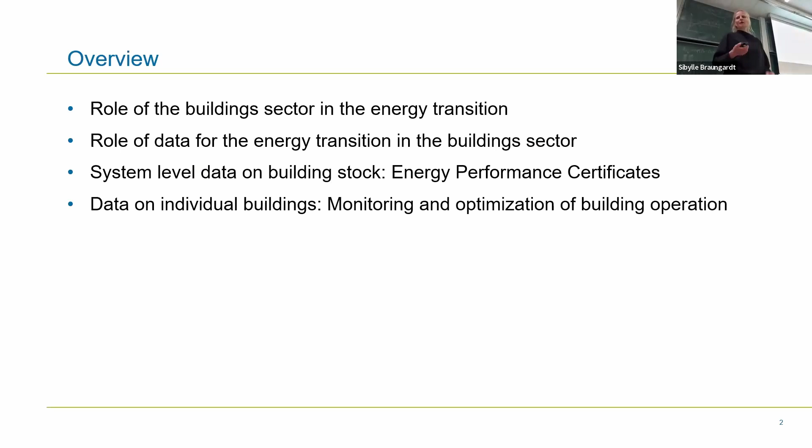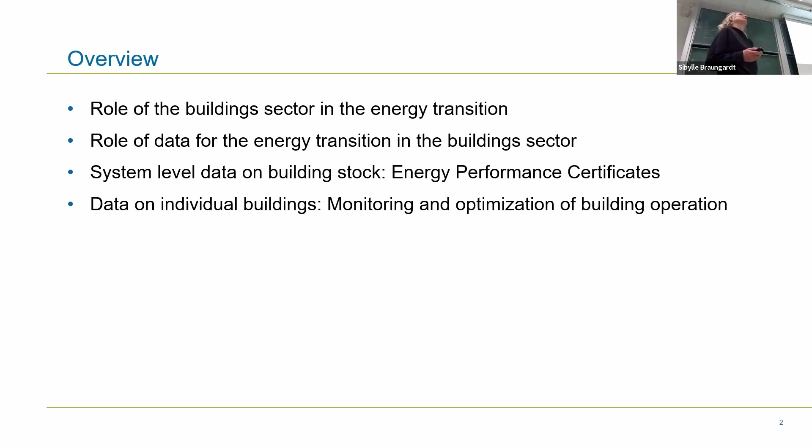Okay, so I start by trying to convince you that buildings and heating sectors are really important for the energy transition. Then I speak a bit about the role of data for the energy transition, giving one example on the system level, looking at information on the whole building stock, which is important for the planning of policies or measures in the context of the transformation, and then on data on the individual building level, rather on monitoring and optimization of building operation.

So why is heating and cooling important? One reason is that heating and cooling accounts for about half of EU energy consumption. A similar value holds in Germany, so it's really a very important share of energy consumption in that sector, and it's really important to look into that.

Another reason is that about two-thirds of total EU gas imports go into the heating and cooling sector, so it's also very important in terms of energy security. It's a sector where the share of fossil fuels is very high - only about a quarter of energy consumption comes from renewable energies in the heating sector. So it's one of the sectors with a very high share of fossil fuels, where there's a lot to do for moving towards climate neutrality.

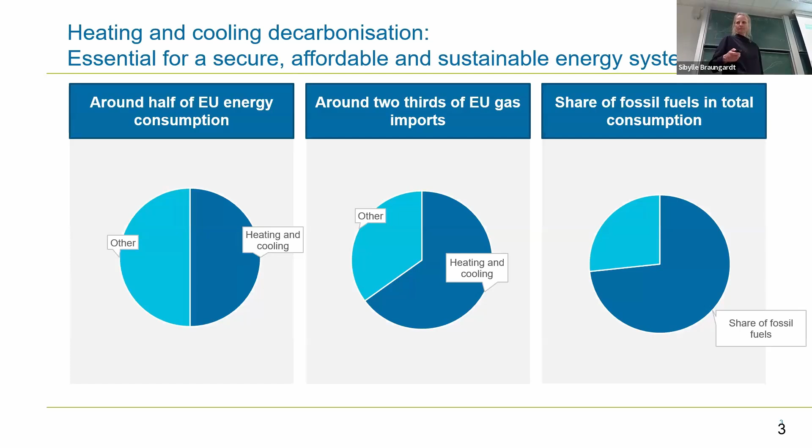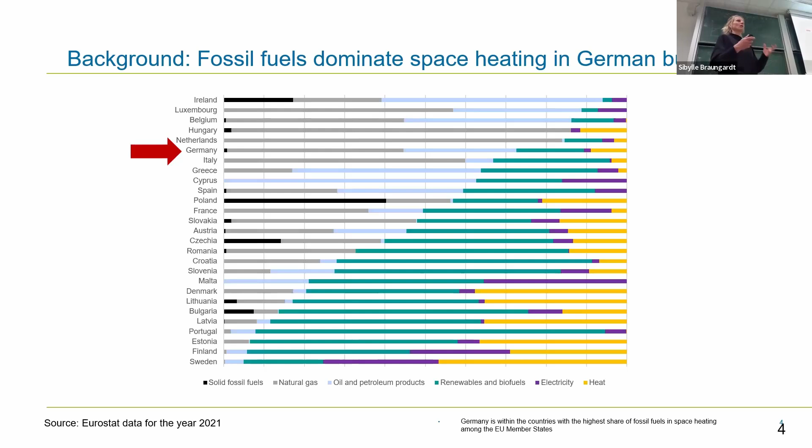This is particularly the case in Germany. Here we can see the distribution of energy carriers in the space heating sector in different EU member states. Everything that is gray or blue is fossil fuels, and we can see that Germany is in the upper level with a very high share of fossil fuels. So it's a sector where there is really a lot to do. Also, it's a sector with very long lifetimes, so it's difficult to move ahead, and this puts even more pressure on the sector. This is also why it is right now in the focus in terms of policy making, so quite a lot of effort goes into the building sector.

Another reason is in terms of greenhouse gas emissions. In Germany, we have the Climate Change Act that sets legally binding targets for reducing greenhouse gas emissions for each individual sector. The building sector is the only sector of all in Germany that has always failed to meet the targets. There were opportunities from the year 2020 until 2025, and the building sector is the only one that never has met its target. So again, this adds to the list of reasons why the building sector is very important to deal with.

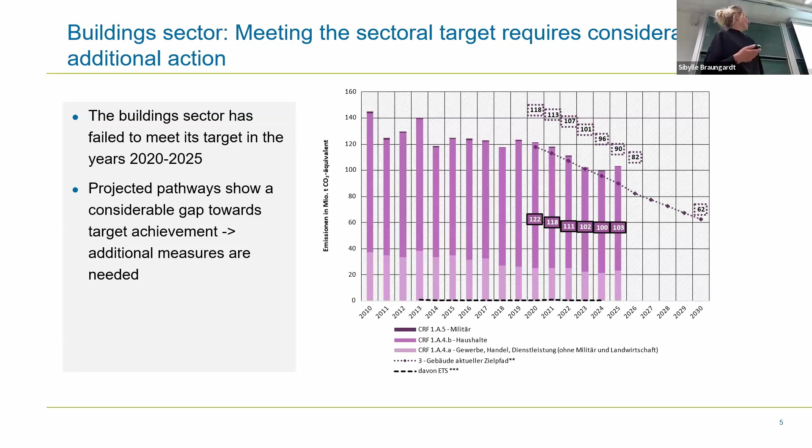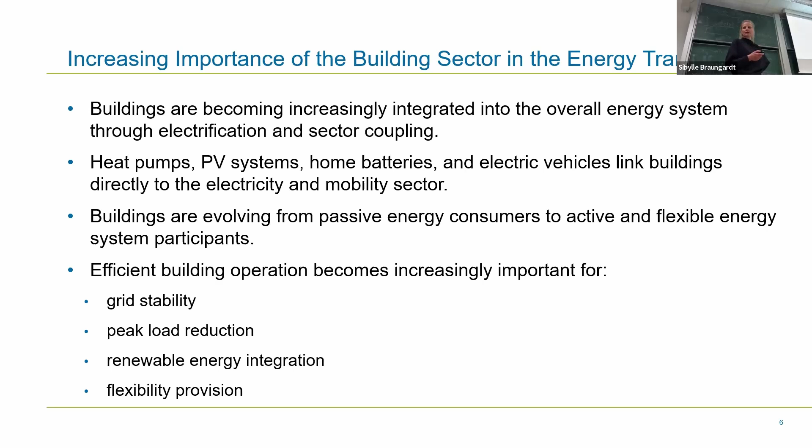When looking at the building sector in the context of the energy system, buildings are also increasingly becoming important in the context of the electricity sector through sector coupling. Using heat pumps, PV systems, batteries, and so on has a direct connection to the electricity sector. Being able to automate processes in the building sector is also very important in terms of grid stability and keeping peak loads at a level that is reasonable for the grid, for renewable energy integration, and also for flexibility. In principle, the building sector has large potential to provide flexibility, but this depends on the way in which it is operated.

So there are some challenges with this, and one big challenge is the data on buildings at a system level. In order to make plans on how to move forward in the building sector, it is important to have data to know about the energy consumption of these buildings.

We do have good data on some structural facts of the building sector - we know the number and type of buildings, whether they are single-family homes or multi-family homes, we have information on construction years, and on the main energy carriers used. This information comes from the census, so for a residential building there is quite a lot of information. But what we don't have is good data on energy efficiency levels and on energy consumption in the building sector. So there is really a big gap of data in these two areas.

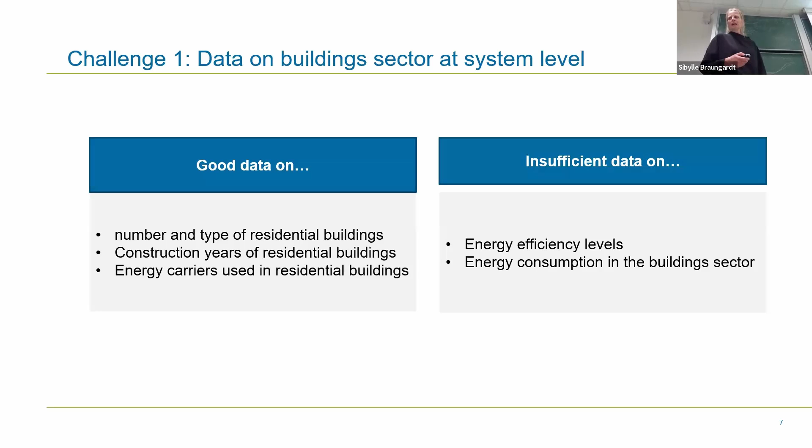The main tool to get information on this, implemented at the EU level, is that all EU member states have energy performance certificates. This is the key tool to provide information on the energy performance of buildings. Probably most of you know the EPCs - in case you have ever rented or owned a building, you should probably know them. These are developed or issued by qualified auditors and are supposed to provide information about the buildings. Basically, this is a tool for the individual level, so that one knows about the energy performance of an individual building.

This is also the only official source of information that gives an overall picture of the energy consumption of all buildings. There is a database which includes not all, but a large selection of these energy performance certificates.

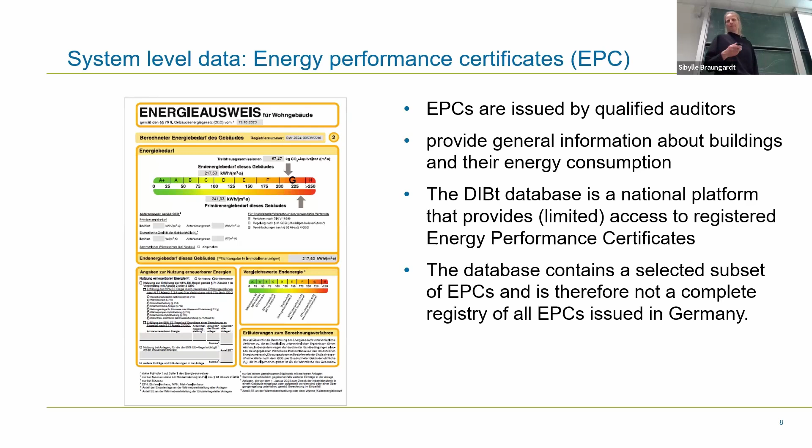That is sort of the only official source of information on how the building stock in Germany is distributed over energy efficiency levels. There are two types of these building certificates. One is demand-based, based on calculations. A person goes into the building, checks the insulation, the windows, and so on, then does a calculation following a certain procedure to calculate the theoretical energy consumption of that building. The other way is a consumption-based certificate, based on the real measured energy consumption of the past 3 years before issuing the certificate. So it reflects real user behavior and is much easier because you basically just need the consumption data.

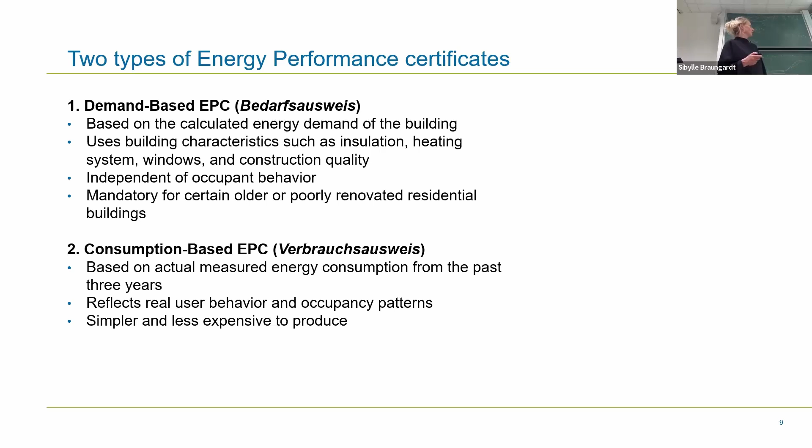This is both legally permitted to have these two types, and the demand-based certificates are mandatory for some older buildings.

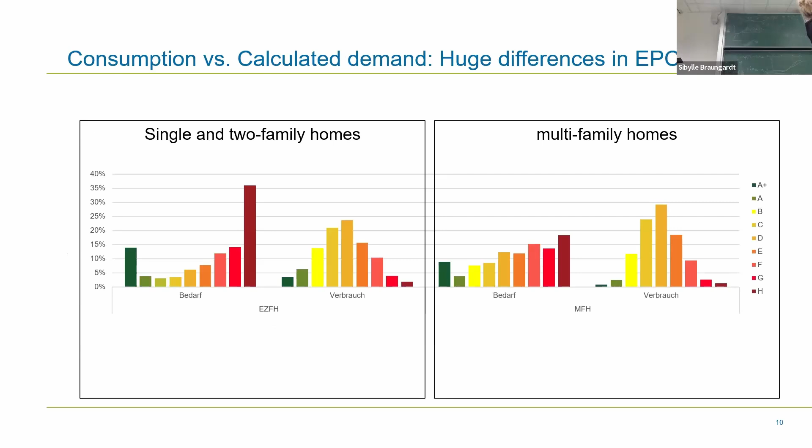Now we come to the problem with this. Here we can see the distribution of energy efficiency classes in Germany based on the database of these energy performance certificates. On the left-hand side are single and two-family homes, on the right-hand side multi-family homes. On each graph, the left side shows demand-based certificates, the right side shows consumption-based certificates. One can see they look very different.

They look completely different. One can see immediately that the calculations don't have anything to do with the consumption-based approach. As I said, it's the only official source of information we have on the energy performance of our building stock, and we have the situation where these two certificates differ very considerably.

Can you give intuition why this is the case? Why is it so dramatically different? Yes, we come to that. It's important to understand what the issues are. I will come to some issues with the consumption-based approach, and some issues with the calculation-based one.

There are some proposed solutions on how to address this. There are some issues in the calculation which clearly don't reflect real behavior. For example, there are certain temperature levels set for the calculation, saying a normal room is at 20 degrees, but in real life people don't have 20 degrees everywhere in the home. These are standards set in the norms that define the calculation, and they just don't reflect reality.

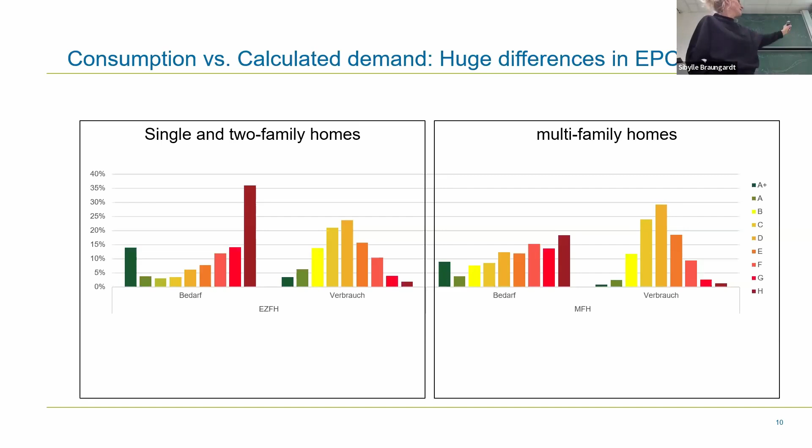One can see that especially for buildings with higher energy consumption, the demand calculation very much overestimates the actual consumption. This is a big difference, and it can also be seen here, especially for these very bad, very inefficient buildings, where the demand calculation overestimates consumption.

So what they did is derive a factor. For any calculated energy consumption, they derive a factor that is then applied to get the actual consumption. This is actually what's used in real life, the approach used for evaluations of policy instruments, where they use a factor derived from a database comparing calculated and actual values.

This factor is used to make up for the problem that the whole calculation is not at all based on real data and does not work at all, it does not reflect consumption at all. Now, with the new buildings directive at EU level, which is being implemented, even more importance is being given to these demand-based calculations.

The other approach being investigated is to take data-driven models. What is done here is basically that one collects a lot of information about the building, such as windows, building age, construction types, and then puts this into models that try to assign a reasonable value for the calculated energy demand.

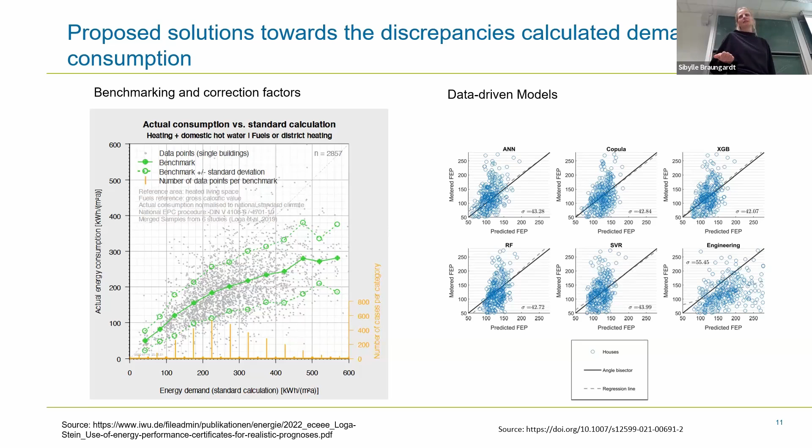So we have the issue that the calculation-based model does not really reflect consumption. Now we come to the consumption-based one. Another approach could be to give more importance to the consumption-based energy performance certificate. However, I will show you that there are also important issues with that.

It's based on the measured energy consumption of the previous three years. There are also standardization processes that apply, where the measured consumption is corrected for some factors, the most important one being a weather correction, because energy consumption in buildings depends very much on whether it's a cold winter or a warm winter.

And then also for the location. The idea is to give information on the energy performance of the building, so there's a correction done for the location of the building, reflecting outdoor temperatures. It's also adjusted to a standardized building area, which is not the normal floor area.

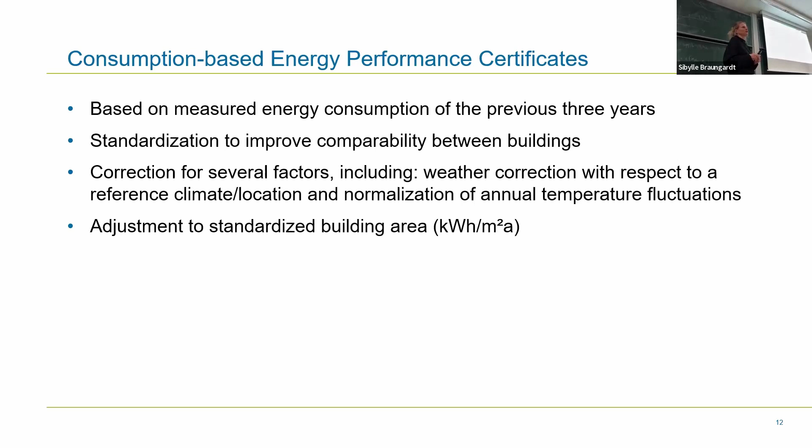Now I would like to show you a real-life example of a consequence of not doing the standardization well in the consumption-based approach. This example is in the context of the CO2 Cost Splitting Act. I will explain briefly what this is.

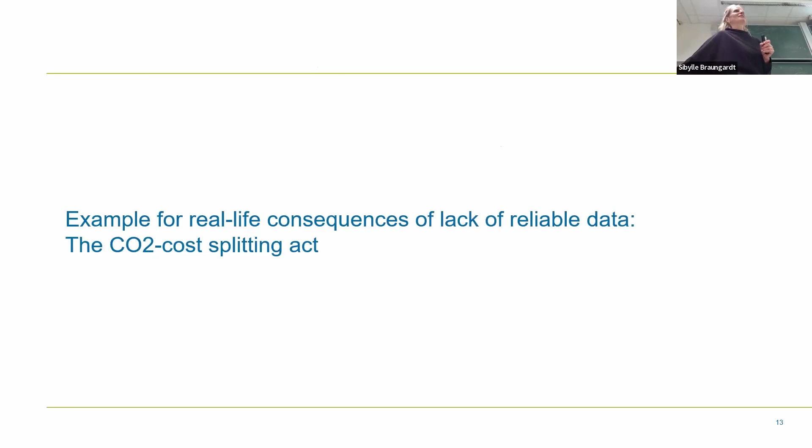I will first explain what this law is, and then explain what the issues with energy performance certificates have to do with that. The CO2 cost splitting act: one important thing to know is that in Germany we have a CO2 price applying to energy carriers for heating, so for oil and gas.

This was introduced last year, 2021, and it has a price path going upwards, increasing every year. We are now in a corridor between 55 and 65 euros per ton of CO2, and this will move into an EU system in 2028. So we will continue to have carbon pricing in buildings.

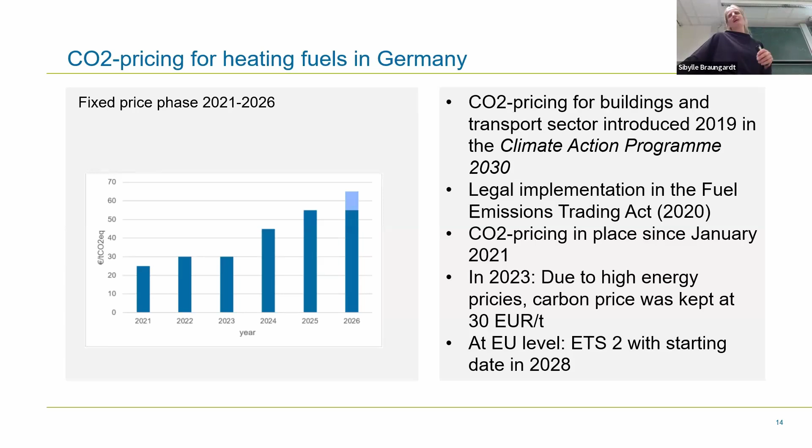In Germany we have a special situation with a very large rental sector. More than half of households in Germany live in rented dwellings. This means we have a building owner who decides upon retrofit measures and can control CO2 emissions of the buildings, and a tenant who pays the energy bill. To account for this, Germany introduced an approach for splitting CO2 costs between landlords and tenants.

If you're a landlord or a tenant, you may know that this cost is split, and it's done based on the energy performance of buildings. In an individual building, if it has a very low CO2 intensity per square meter, the tenant pays all of the CO2 price. If the building is inefficient, with a very high CO2 intensity, the landlord pays the whole bill.

Considering that we don't have good databases for knowing how efficient buildings are, there was a bit of a situation when setting up this scale, because there's a total target that landlords overall should pay about 50% of CO2 and tenants should pay about 50%. So the question of where exactly to put the limits of the scale required information on the building stock.

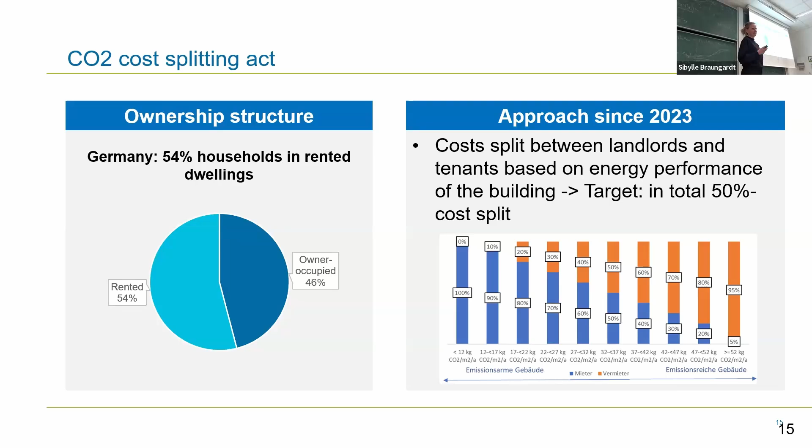What one can do is take different data, and the data source used for this is the distribution of consumption-based energy performance certificates, the one we saw earlier, because the consumption is what matters, combined with census data, which helps to know how many buildings, what floor space we have, and how they're heated, which is important to calculate the CO2 emissions, since gas has a lower emission factor than oil.

So putting together these two data sources, one can model the distribution of CO2 costs between landlords and tenants, and the result of this is shown here. These are the different classes from 1 to 10, the ones that we saw on the previous slide, and on the left-hand side, the tenants pay everything.

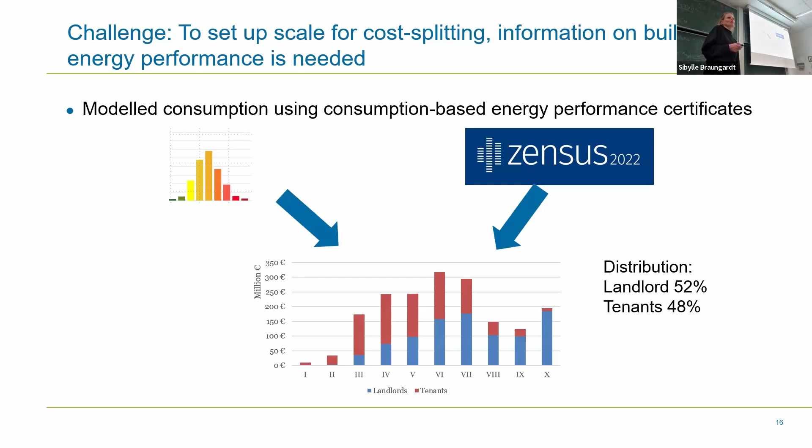In the right-hand side one, the landlords pay most of the CO2. Doing this exercise, one gets to the fact that landlords pay about 52%, and tenants 48%. So now, in the evaluation of this law, this was questioned, and real consumption data was used to check if this distribution is actually the targeted 50-50 split.

The data of measured consumption used here comes from billing companies. In Germany, when doing the heating billing and submetering, these are usually companies that do that for many buildings, and they have a lot of data on energy consumption of these buildings. In these three graphs, we can see data from three different billing companies, where one can do exactly the same exercise of combining it with census data.

Already at first sight, one can see that many more buildings are actually in the classes where tenants pay a much higher share, and there are fewer buildings in the classes where the landlords pay the higher shares.

Looking at the distribution from these data sets, one gets something between 26 and 36% for landlords and 64 to 74% for tenants. When we looked into that, we were first a bit surprised and didn't really know why we come to this large difference.

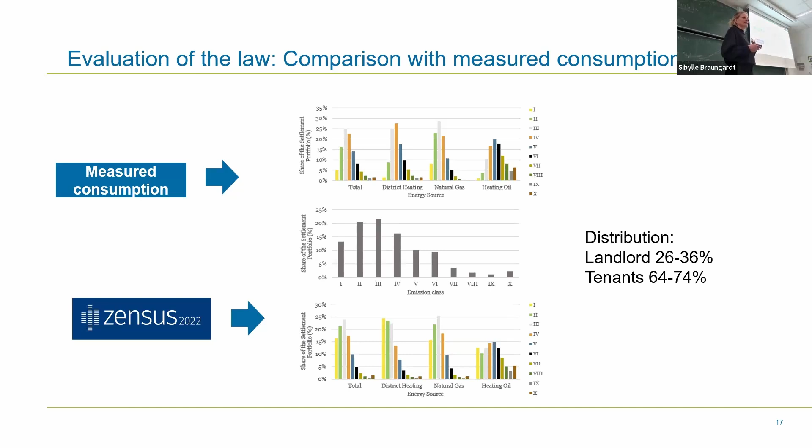One reason is the approach in which climate correction is done in the energy performance certificate. This is done using heating degree days. A degree day is defined as the difference between the indoor and outdoor temperature, taking the average temperature of that day.

These days are only counted if the outside temperature is below a certain value. In Germany, this is 15 degrees—we are supposed to start heating buildings at 15 degrees outside temperature. The heating degree days are then basically the sum of this temperature difference, just on the days that are counted, where the temperature is below 15 degrees.

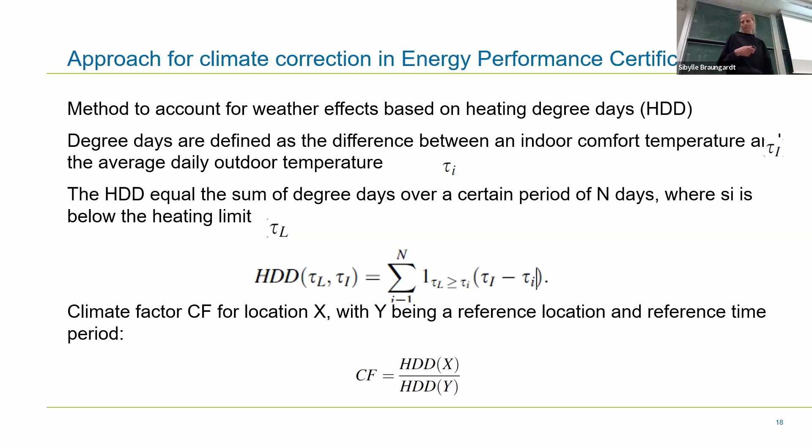To normalize the measured energy consumption, what one does is take the heating degree days of a reference period and a reference location. So this is the method by which people adjust the measured consumption to location and time. And now, the time

This leads to a big distortion in the picture that we have of our building sector in Germany. Basically, the way in which the statistical correction of the measured consumption is done ends up meaning that in 20 million dwellings, tenants now have to pay more than they were supposed to pay. So these are simple examples showing it would be helpful to really look into the way energy

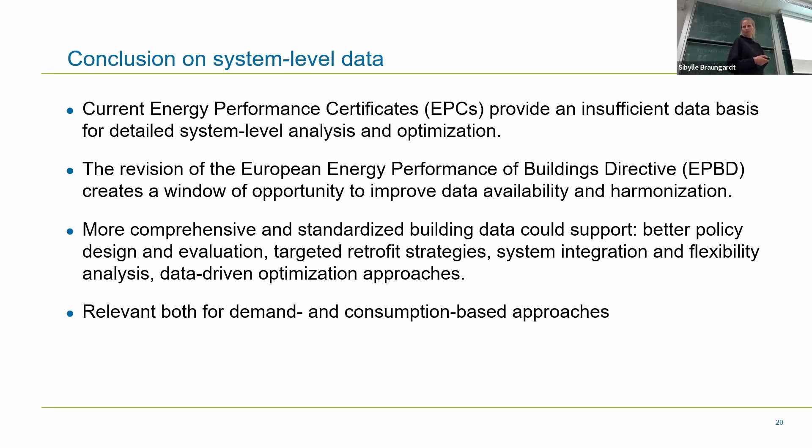Then we come to the individual buildings part. So here we go away from the overall building stock and move to the individual building. Here we have a situation where many heating systems are operated really inefficiently, with no control or poor control, outdated settings, and far from optimal operation.

I took here a picture from a project that I'll come to in a moment, where together with the sensors group at the Faculty for Electrical Engineering, we installed a system in schools. What you can see on the picture is the black line, the temperature in the rooms before we started the project. The red line is after, where one can see that before, the temperature was always the same, at nighttime and weekends it was always the same. So this is a very common situation, that there is really no control at all, that the heating system just runs at full level all the time.

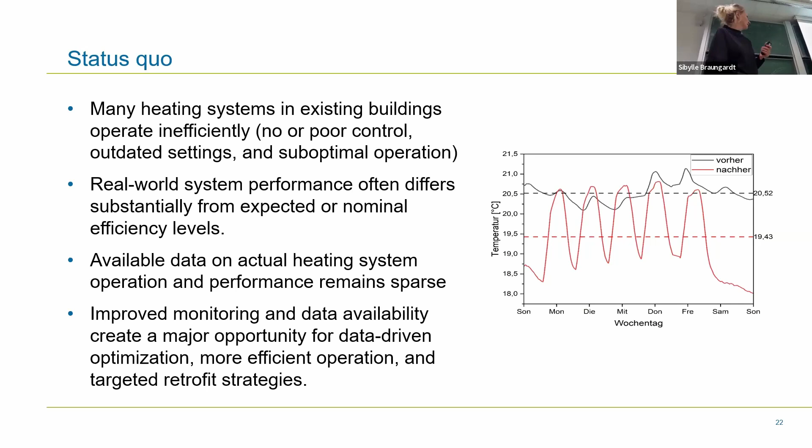Another common situation is that no one ever looks at this data. Maybe they look at the consumption once a year, but there's not a lot of information and even less control on heating systems. So this is really a big opportunity, because now there's a large variety of technologies that can easily be installed in buildings to get more information and more possibilities to optimize or control.

This can be controlled by the measured temperature, so the data from the sensor node measuring temperature can then be used to control the thermostat. There are about 3,300 thermostats installed in the schools.

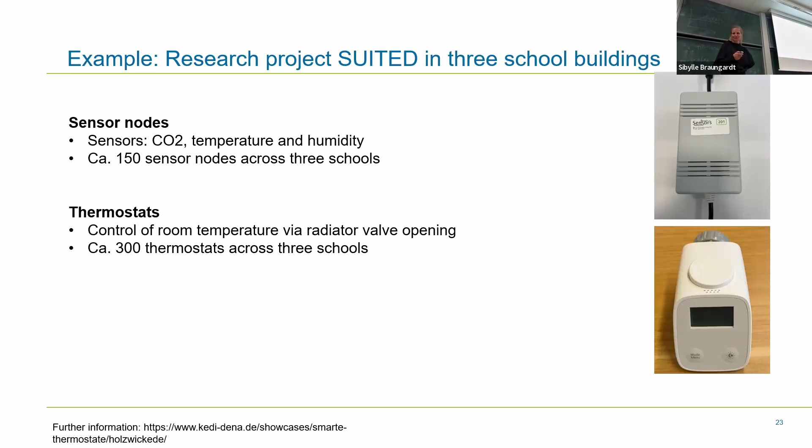So what is the aim? One aim is just to have long-term monitoring of these parameters, to see how they behave. Then an analysis of the air exchange rates — I'll come to that in a moment. The CO2 helps us know the rate at which air exchange takes place, at least if there's no one in the room, so there's no new CO2 source, and then we just have it.

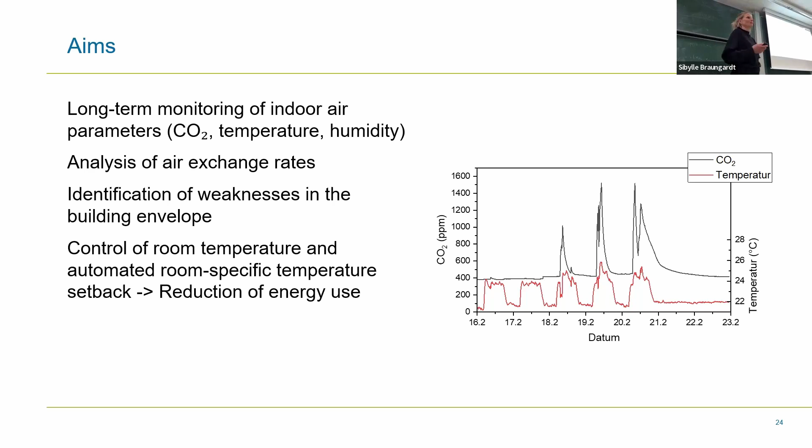That's used to identify weaknesses in the building envelope — I'll come to that in a moment — and also to use the measured data to control room temperature and reduce energy use with that. In this project, we actually take a very simple approach, just using the measured data to have a controlled temperature, and this already in the last winter period led to energy savings of about 10%. So even with a simple approach, there is really a lot of room for energy savings.

Regarding the airflow rates, what we did is we wanted to know the air exchange rates of the rooms, because this is an important driver for heat losses. If there's a high air exchange rate, of course a lot of heat goes out of the building, and so here we were interested in measuring this.

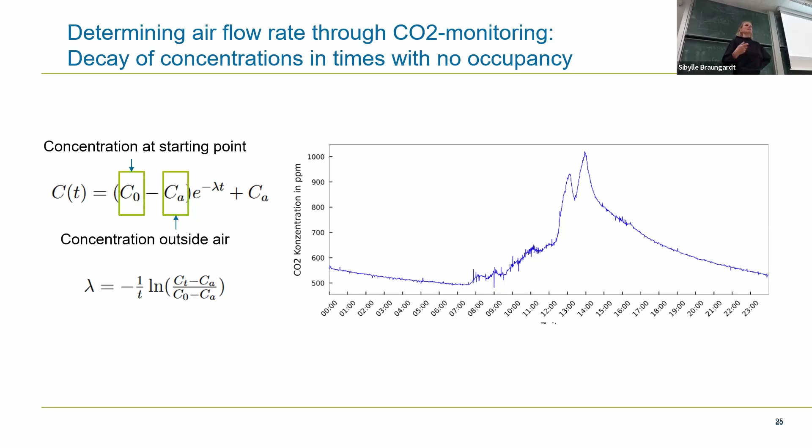We can see here a typical day: at 8 in the morning the kids come to school, CO2 values increase. One can sometimes see the window opening, and then after school we have this decay part where there's no one in the room. This decay part is then used to calculate, at an individual room level, the decay rate of CO2 and with that the air exchange rate.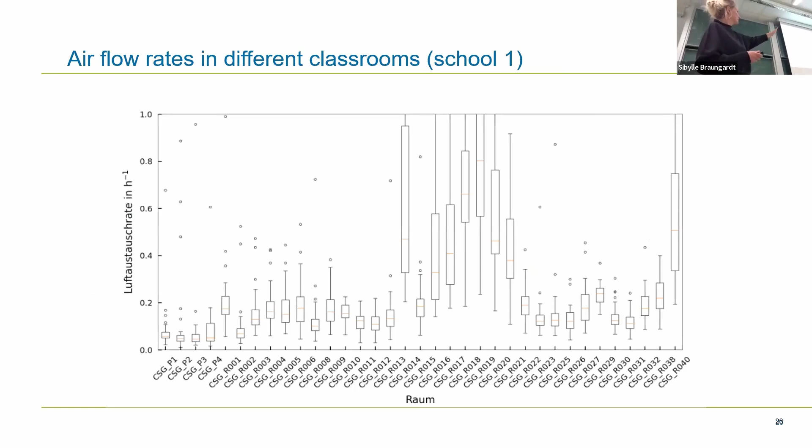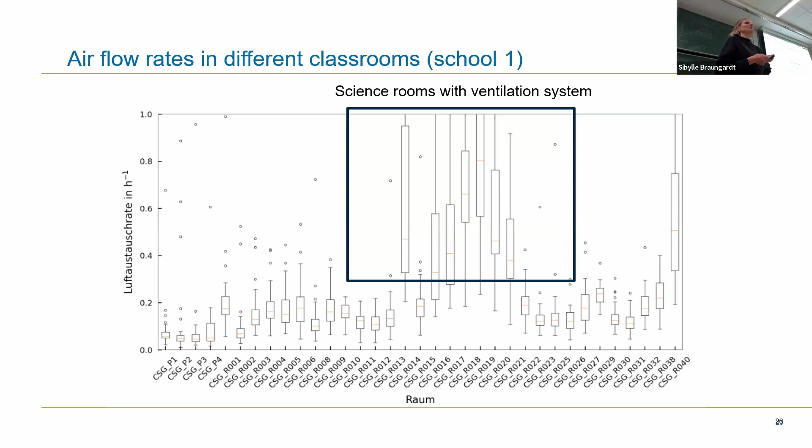We did that for all the different rooms in the school. Here every data point is one room, every part on the x-axis is one room, and we can see the different rates. There are some rooms that have much higher exchange rates — these are the science rooms which have forced ventilation systems, so it's not surprising they have higher exchange rates.

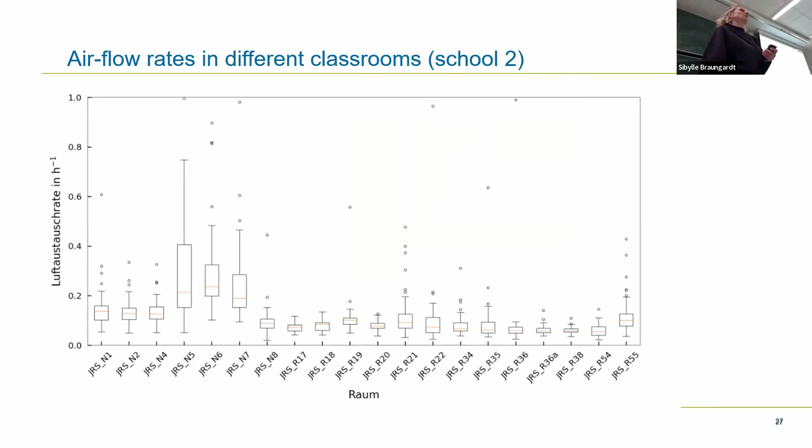But then there are a few rooms that also have higher exchange rates and don't have forced ventilation. When we looked more closely into these rooms, we could directly find the reason for the high exchange rate. In one, the window doesn't really shut properly. In another, a window has been replaced with sort of a wooden piece, so it was very clear what the inefficiencies were.

So this is an example where with very simple measured data and a very simple approach to calculate the decay rate of CO2, one could directly detect inefficiencies in the building. In principle, there are many possibilities to use sensor data to look at how the building performs.

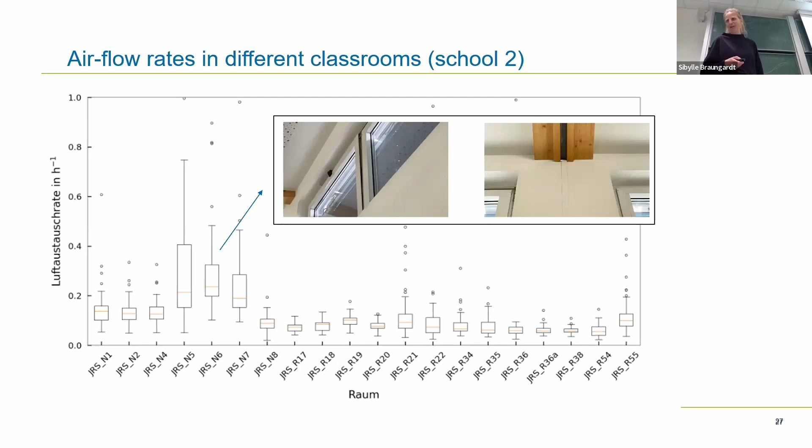And so as a bit of an outlook, here we looked at the decay rates, but this is basically only one part of how energy goes out of the system, or how heat escapes the building. And there are, of course, many different heat flows. On the one hand, solar radiation going into the building, also heat gains and losses through ventilation. So this is something that one cannot really avoid. Also internal heat gains, and so all different kinds of heat flows.

Okay, and so in principle, it is also possible to use the measured data on temperatures. If it's spatially resolved and time resolved data on temperatures, plus the decay rates of CO2, one can learn a lot about the energy performance of the building, which can also help energy auditors that are actually issuing the energy performance certificate. So there's a lot of room for improving what we know about our buildings by using measured data.

Let me ask one thing. So the sensors, is it more that you have some strategy when to turn on and off the heating, and the sensors are measuring the temperature in the room? Or is it that the sensors measure the temperature and then act upon this, like turn on and off the heating? Because here you made the example that there's a problem with the room because the air exchange rate is larger, there's a broken window or something. So is it taking the sensor data directly to change something, or is it to learn something afterwards?

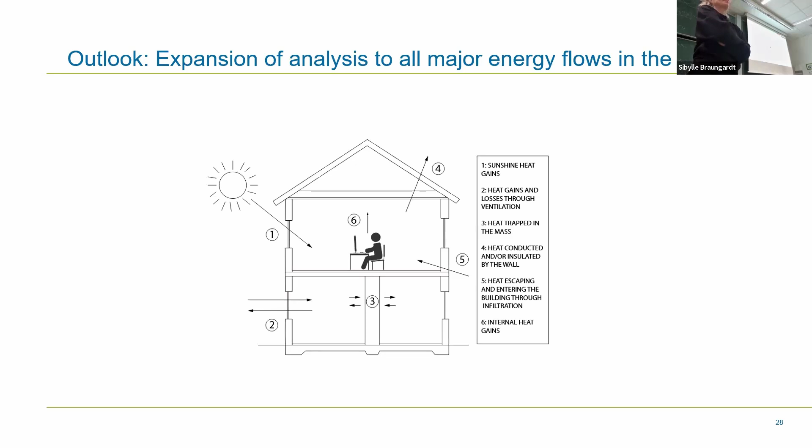Okay, so concluding on this second part, monitoring and optimization, there is an increasing use of sensor data and smart thermostats. Also, they are becoming cheaper and easier to install. So there is quite a lot of potential to use this in real world conditions. At the same time, this is really not used very much. So there is a lot of room for improvement, both on the diffusion side as well as on how these systems actually work.

It's on the one hand for the control directly reducing energy demand, but also on the level of identification of inefficiencies, opportunities for optimization. So really also in the whole sector of energy audits, it would be very helpful to use sensor-based methods in order for the auditor to be able to find out more information about the building quickly and easily.

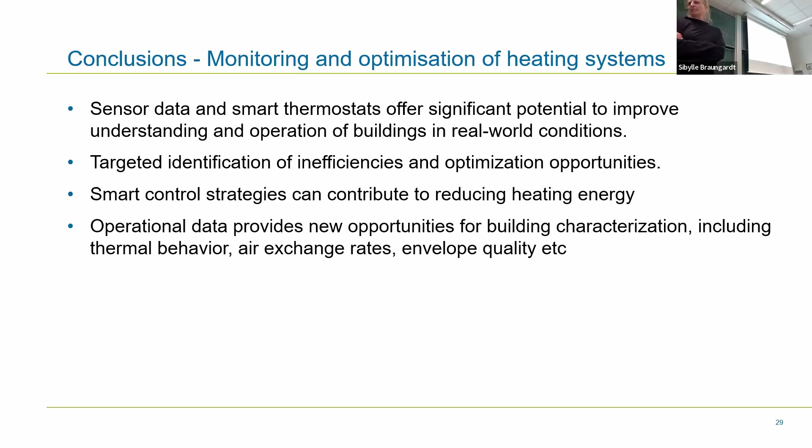So we showed in our project, but of course there are many other projects, that these smart control strategies can contribute significantly to reducing energy demand. And so with this overall picture of the building sector very much based on fossil fuels, this is sort of an easy and fast way of getting at least some reductions. Yeah, this operational data really gives a lot of opportunities to work with on building level, on the level of how people use the building, thermal behavior, air exchange rates, and so on.

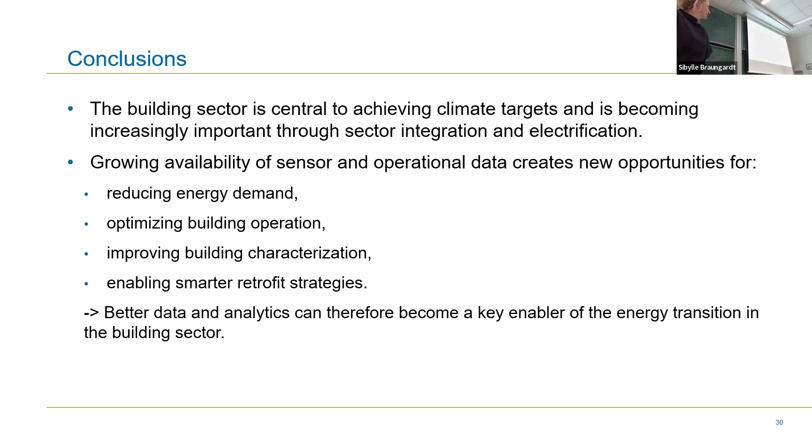And so overall, I hope I could convince you that the building sector is a really interesting and important sector to look into for many reasons. And that in that sector, we really have a nice and growing opportunity to make use of data to reduce energy demand, optimize operation, improve characterization, and get a better plan for retrofit strategies. So if I better know the inefficiencies, it's easier to plan. So better data and analytics can be a key enabler for the energy transition in the building sector.